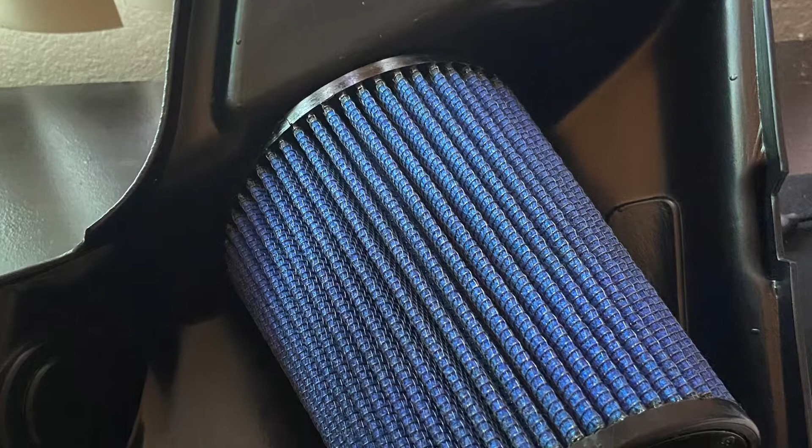Hey, so we're going to be doing a sound comparison clip. This is going to be a stock intake here for the Nissan Altima before I install the aFe Stage 2 intake. So this is the startup cold.

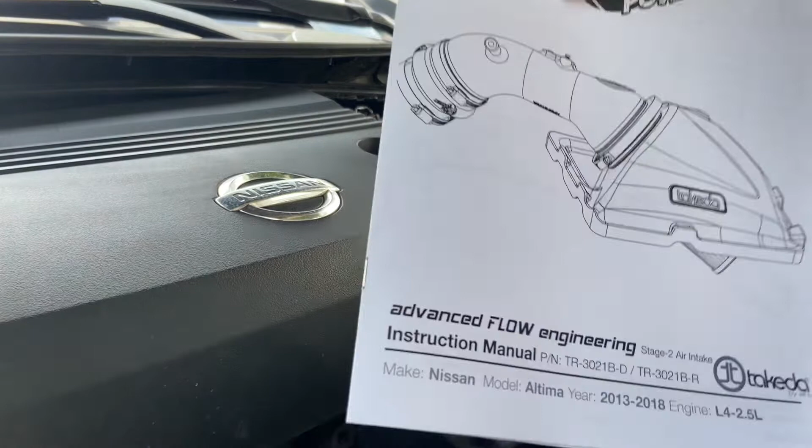All right, so here we go. This is the intake that we're going to be installing. We're just going to be following the directions. This is my very first time taking this apart, so always follow the instructions.

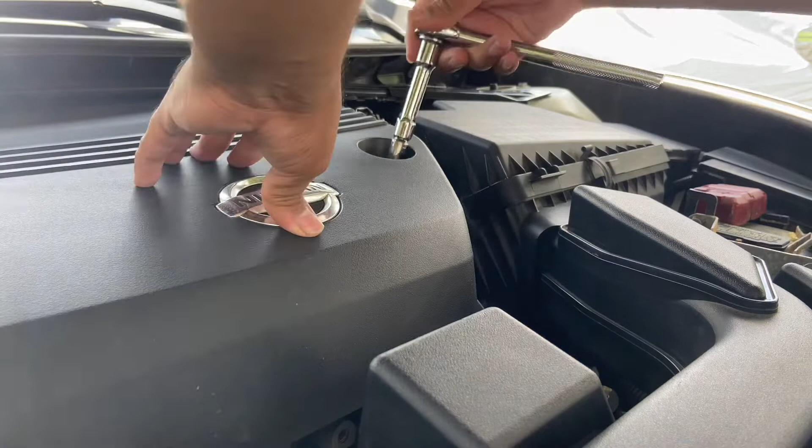The engine's still a little bit hot, so I might have to stop filming for a little bit, but I'm just going to try and get most of what I can off.

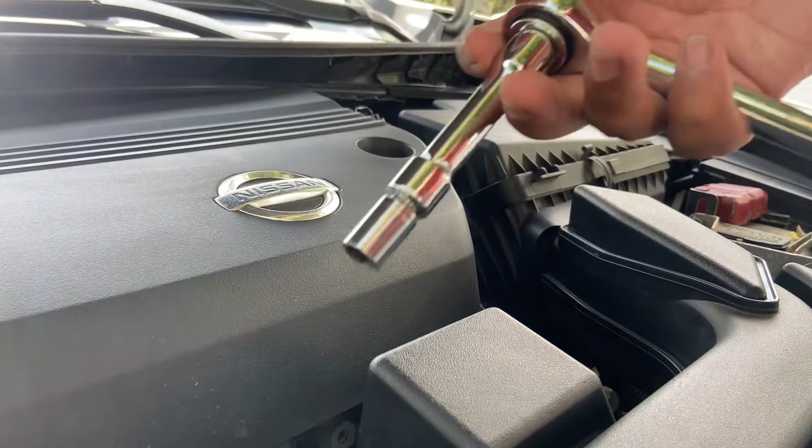Step 1 in the instruction assembly is to remove the cover. It's just held together with 3 10mm nuts. Not too crazy, any standard ratchet, you can go ahead and take it off. Kind of need an extender for this one, it's a little deep, so there's that.

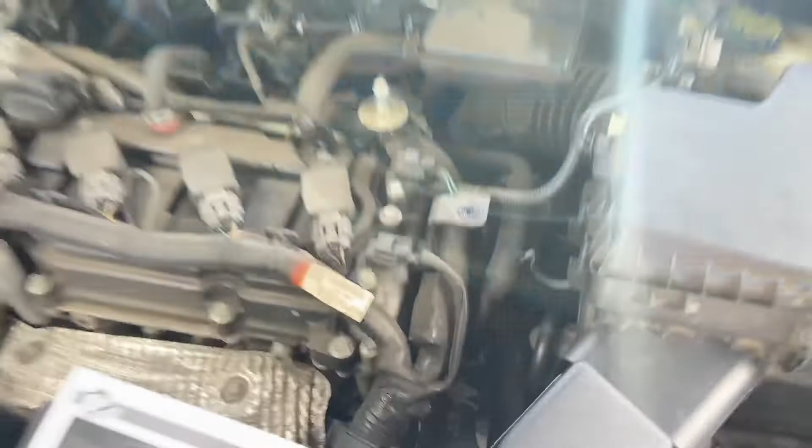And we should be able to remove the housing. Alright, so I guess the cover was just held on a little bit tightly by this right here. So when you're pulling it, make sure you firmly pull right there.

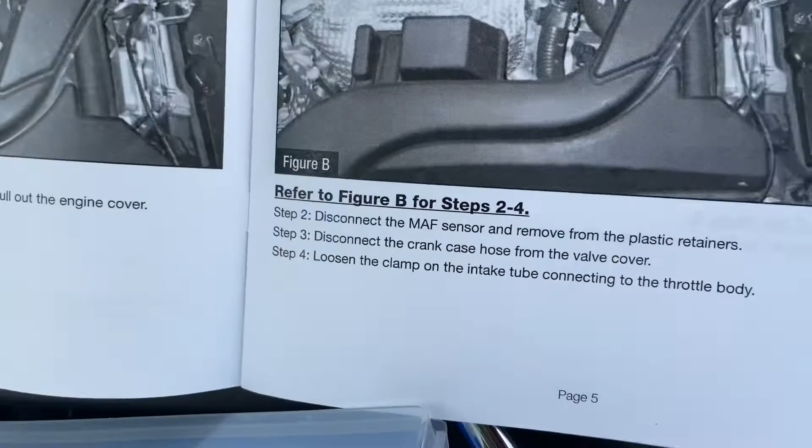Instructions also call for step 2, to remove the clips. Easy enough for this car, clips are easy to take off. There's one back here.

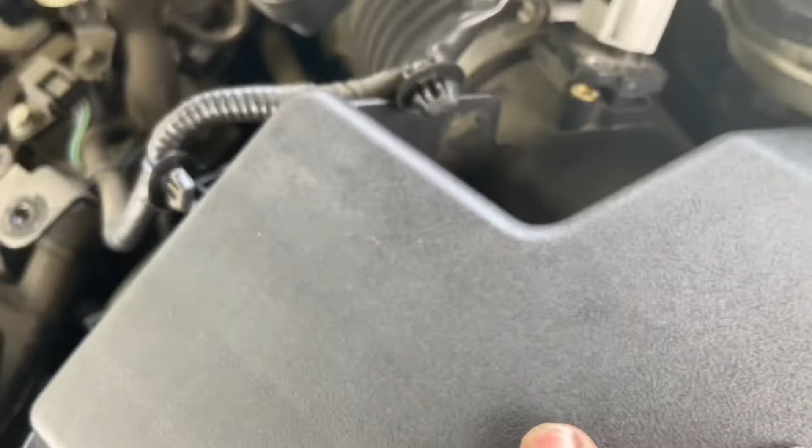And then it also calls for the removal of the mass airflow sensor, which is right over here. We just wipe the lens real quick. This comes off pretty easily.

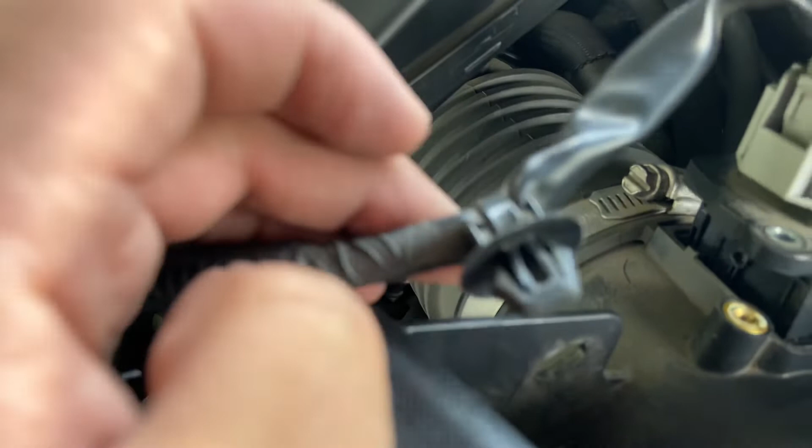This is your sensor. These little clips, you must be a little bit careful. You're gonna want to pinch these clips with little pliers. There's 2 of them, and they're a little bit tricky because one of them's in here, and the other one's right in here.

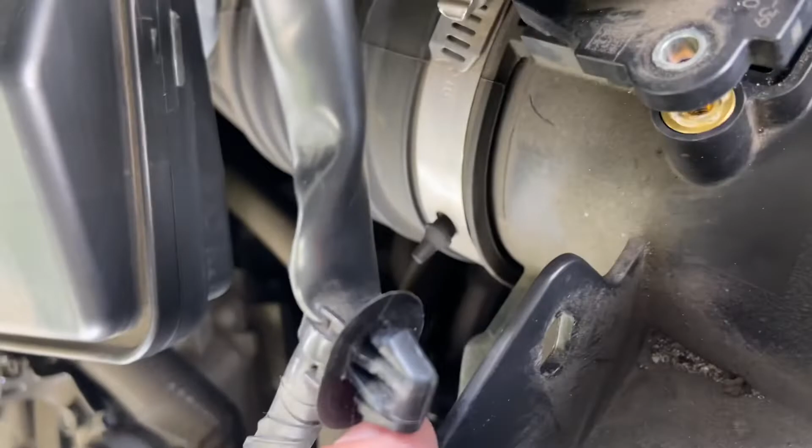But that was easily able to be taken care of with just basic pliers. And the tricky one was the one underneath here. I'll show you a little trick: use your flathead screwdriver and go ahead and pinch it. If you have somebody to help you, you can pinch the other side of this right here, but you could just pinch one side, kind of hold it, and then pull it, wiggle it, and then pull the other one out. So that one was pretty good.

Then the removal of the hose right over here. So we went ahead and did all that now, so stay tuned for the next steps here for you guys.

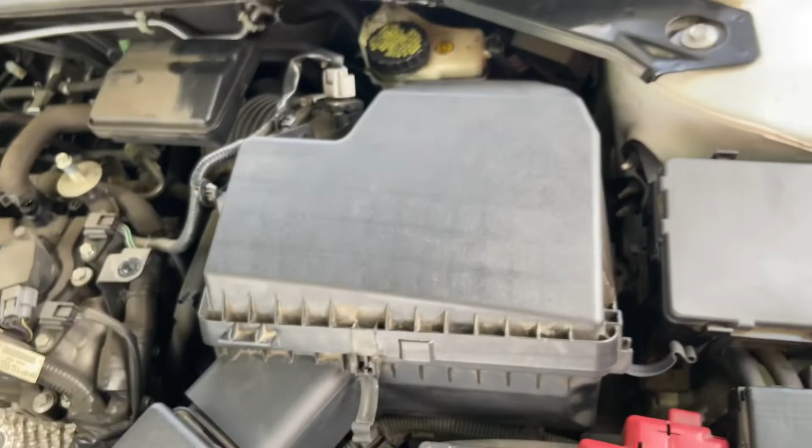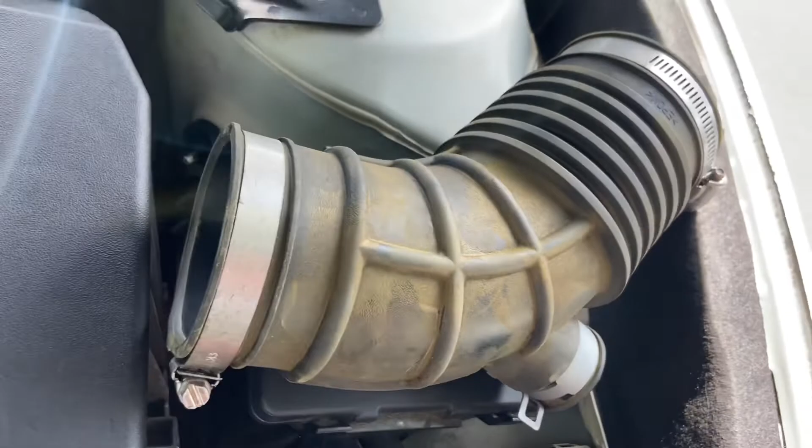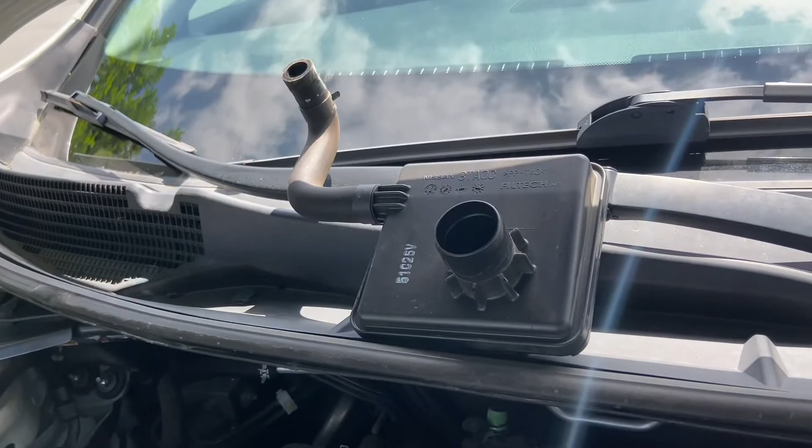Check it out, alright, and then we went ahead and proceeded to take off the old intake tube, which connects to the throttle body right there. We got everything taken off right there. These, I believe it's the secondary air inlet or whatever, it's like for emissions, so we're just gonna take this off now.

We're gonna start installing pretty soon the intake, so let's keep getting at it.

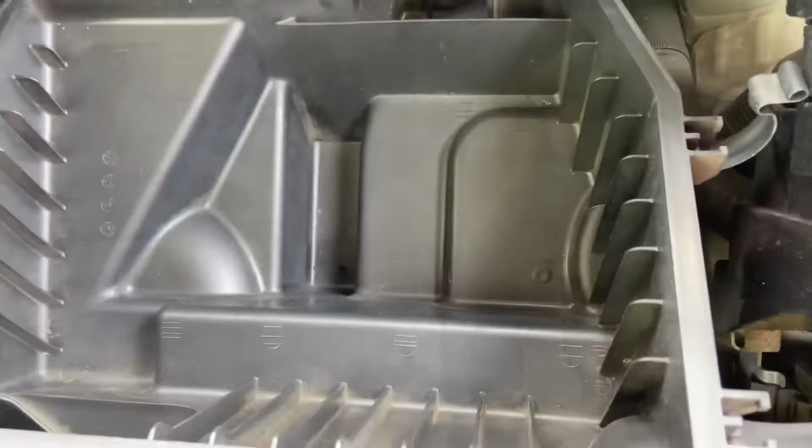Alright, so now we got the box off. One big thing you guys should probably do is clean this, because this is, at least right here, it's really dirty in your OEM box, especially up in here.

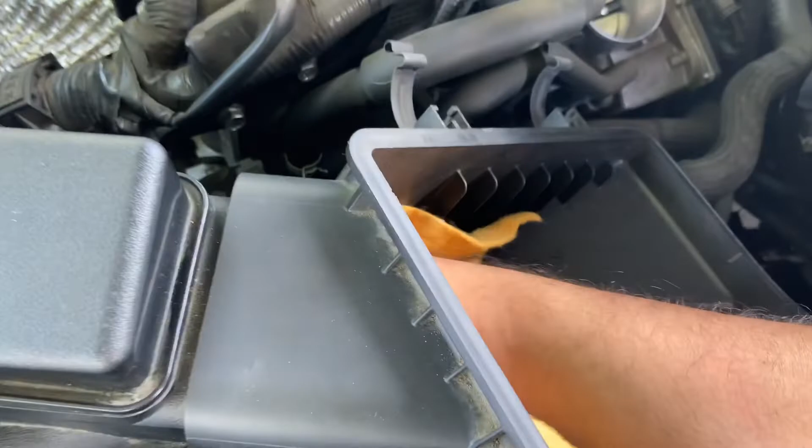Good little method, let's give it a good old one of these bad boys, just jam it up in there. Yes, yes, cue the innuendos. But yeah, get it in there into the intake, because this car gets its air from the front here. So go ahead and give it a good scrub.

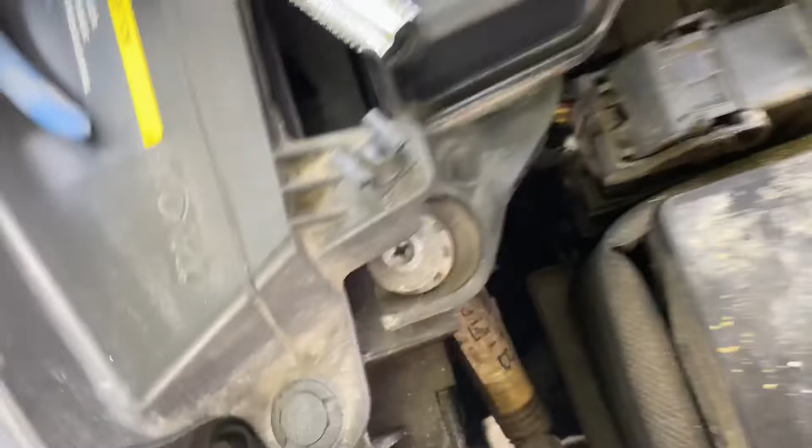There you go, look at that, look at how much dirt came off. This is all gonna dirty your intake, so make sure you do a good job.

So we're gonna go ahead and clean this a bit, and then we'll tune back in. Alright, welcome back guys, so we went through a few of these steps here.

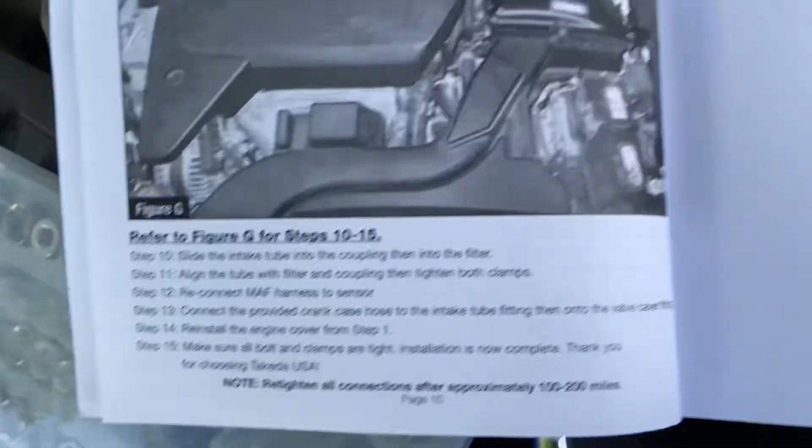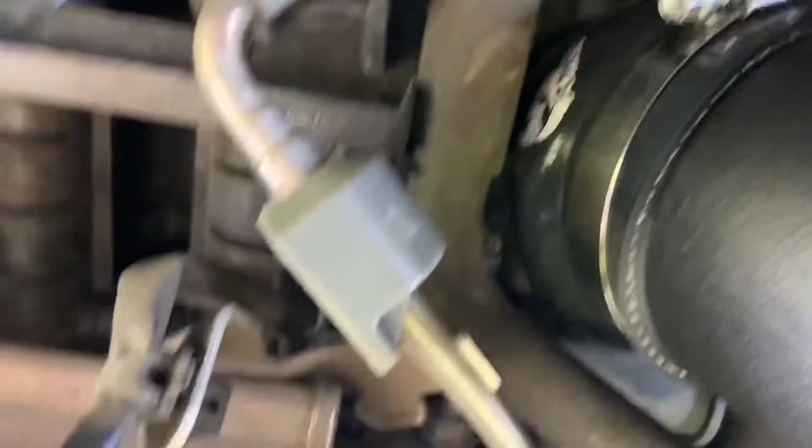We went ahead and reassembled all the mass airflow sensor, and we're pretty much at the end here. We're just reconnecting everything, and this is what it looks like. It uses all the same mounting hardware, so make sure you clip everything back up. Your mass airflow sensor is hooked up, make sure the coupling down here is assembled, and you'll also use the rubber grommet and the little intake tube to connect everything.

It's nice and sturdy on there. The instructions do recommend re-tightening after 100 to 200 miles, since the car does move around. I also didn't super tighten everything - I want to make sure the fit is right.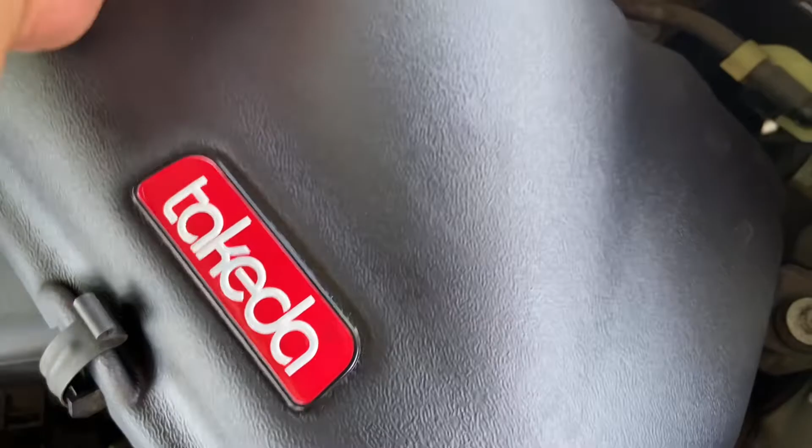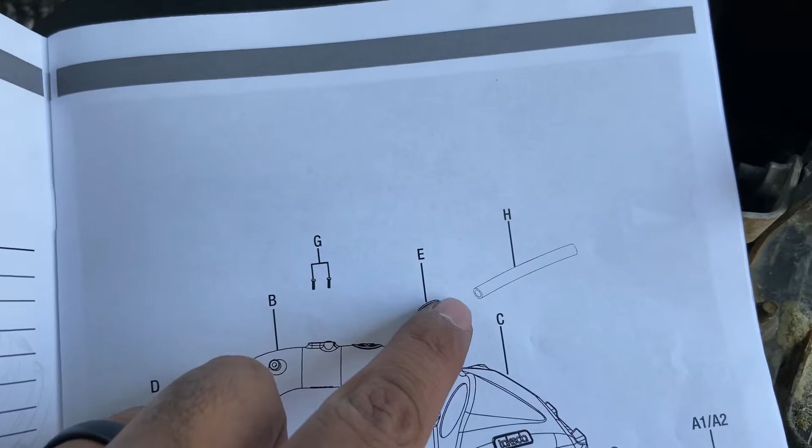One thing I will say, though, is I didn't receive this part here, part H, which I believe is the hose. I'm going to have to use the stock one and kind of bend it to connect it. It's in place, not flexible that much, but with the clamps it should be able to hold on to that. So just FYI, make sure you do receive this part H. I'm gonna have to call them and have that shipped to me later.

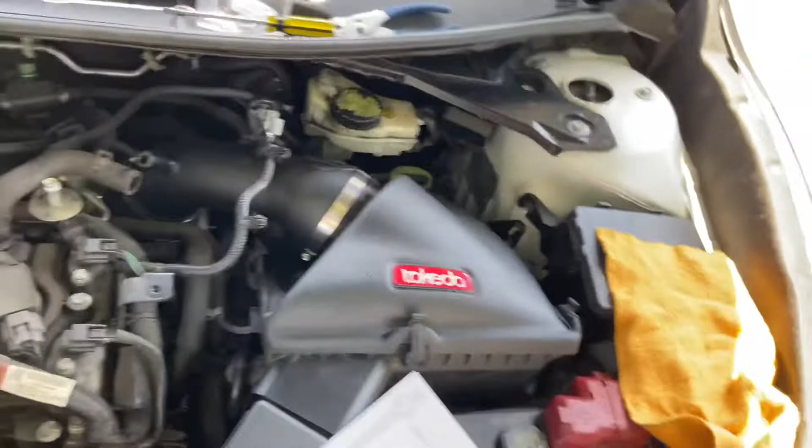For the most part, there it is installed. Let me move that out of the way. It's in there, and I'll go ahead and dress everything up, and then we'll do another startup.

In case you're tuning in, this is the Takeda Stage-2 aFe power intake here for the 2015 Nissan Altima.

Alright, here we go. So everything is installed. Like I said, we had that little issue with the hose, but I'm gonna go ahead and email them or give them a call. I already left them a message about getting the proper part.

We do have the stock hose on there still, which is a little bit short, so the sound clip may be affected due to that. Just a heads up, it might sound a little different.

Once I get the proper hose, I'll probably record this section again, but this is the installation of the Takeda Stage-2 intake, and we're gonna go ahead and do an engine start and a little rev, and we'll see how it compares.

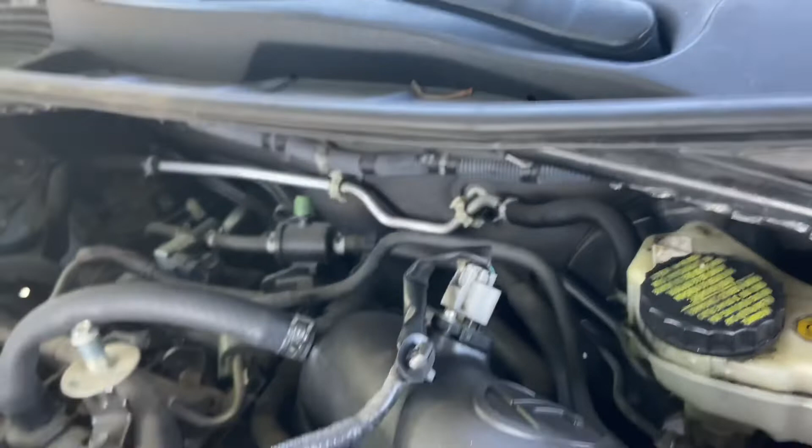Alright, so this will be the final little update here. I went ahead and bought myself some 5/8 hose at O'Reilly's. In the meantime, while I emailed the manufacturer, Takeda, for the missing hose, I'm sure they'll give me one, but I didn't want to run with that sketchy kind of setup I had.

So I went ahead and just got a hose, 5/8, just like the stock one, ran it straight - it's a perfect, good fit. It should run way smoother now. But yeah, there we go, that's pretty much the complete build.

Let's throw the cover back on there. I'll go ahead and bolt it on in a second, but just to give you a little idea, it's pretty much what it looks like with the cover on.

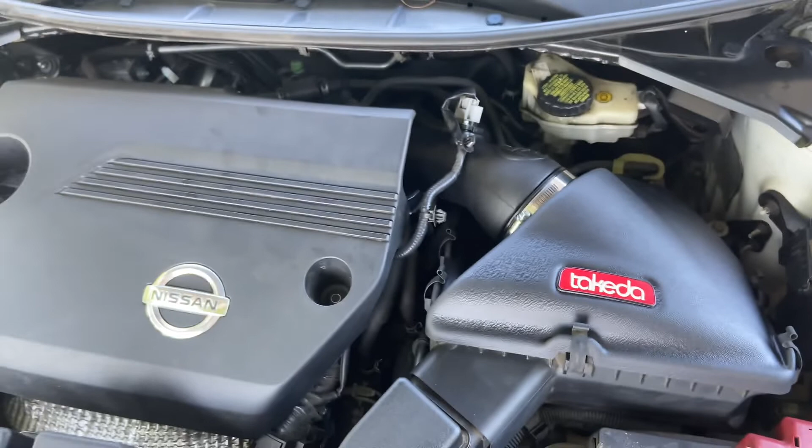Alright, and here we go. Here's the sound from a dead stop.